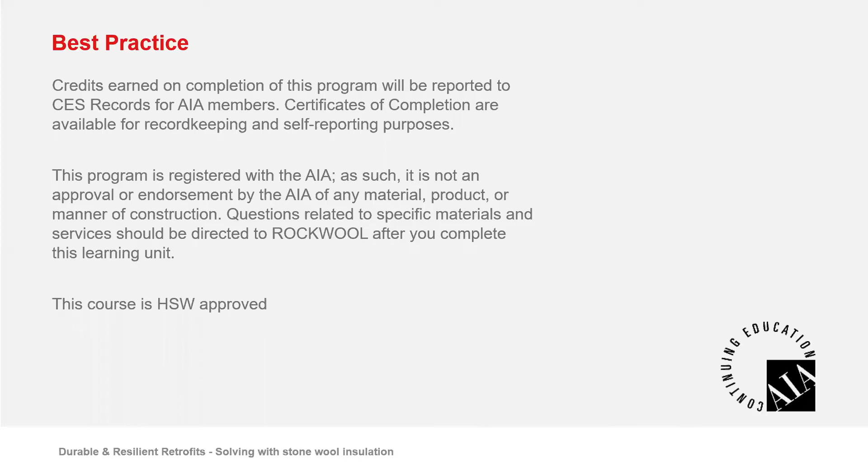And I think very excited here to be talking about retrofit, which is a hot button topic, definitely in New York, but also in California, and it should be globally. Hopefully, we'll start tackling this because a lot of the energy use that's coming out of our building stock is coming from buildings that have already been built and will continue to operate for decades to come. So it's a very critical component of our carbon reduction strategy globally. And we're going to get into some of that as we go through this program today.

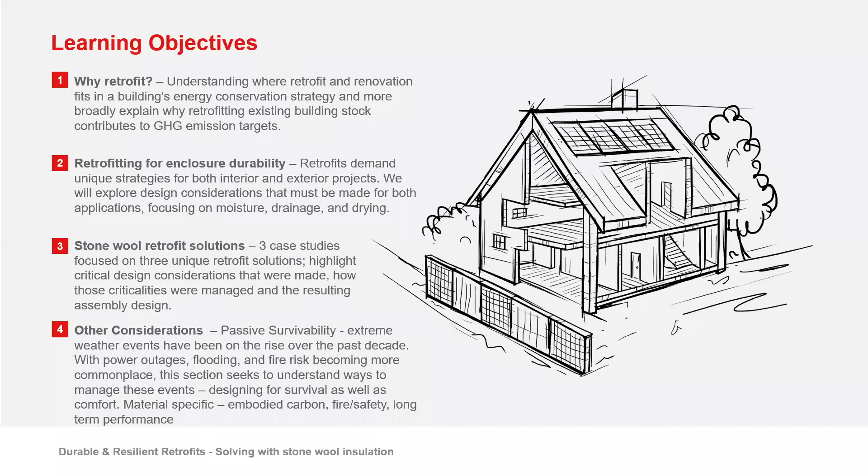But there's a lot of other considerations we want to make, right? We're trying to reduce the operational energy use of our buildings, but we also want to consider the embodied carbon of the materials that we're trying to select. Understanding the durability and robustness around fire performance should really be critical. Understanding long-term performance, right? We don't want to have to make these modifications and spend more energy in another decade to do all this work again. So all of these things come into play as far as considerations.

So today's program, obviously, we're going to be talking a lot about stone wool insulation. So these are going to be strategies that don't include foam plastic. And that's another unique part about this program, looking at more, we'll call it sustainable, healthy, durable, robust solutions using stone wool. And so I want to start off by minimizing any confusion about what stone wool is, because you probably hear a lot of terms like mineral fiber, mineral wool, stone wool, obviously slag wool.

So just to start off here, mineral fiber is really the overarching generic term for fibrous inorganic substances. And that's then categorized into three groups: fiberglass, which I'm sure many of you are familiar with, more low density, your pink batt. Then you've got mineral wool. And under the mineral subheading, you've got either stone wool or slag wool.

So mineral wool is made out of two primary ingredients, which is volcanic stone, rock, and then slag, which is the byproduct of iron ore when you're producing steel. So slag makes up the recycled content. When you have a higher percentage of stone versus slag, it's called a stone wool. If you have a higher percentage of slag than stone, then it would be called a slag wool. So both are under the mineral wool segment.

We're going to be talking a lot about stone wool here today, just so you have an understanding of what that terminology means. And then you've got refractory ceramic fibers, which we're not going to be getting too deep into today. That's more of an industrial type of application of materials for high temperature, but not really in the built environment for what we're dealing with.

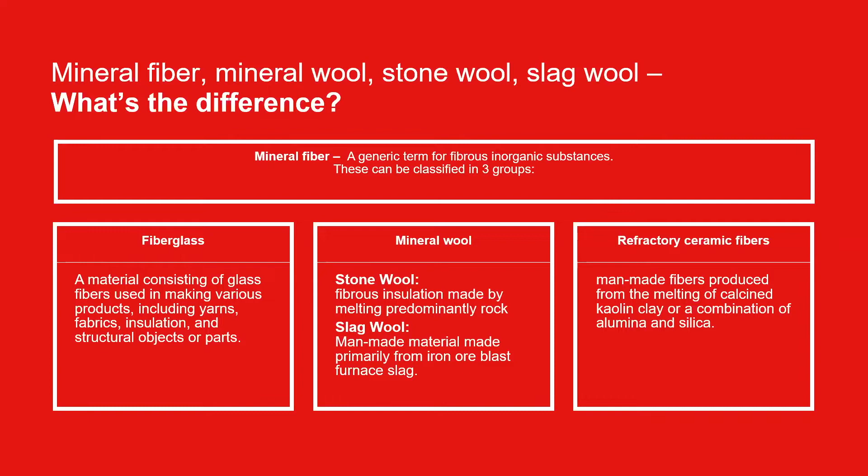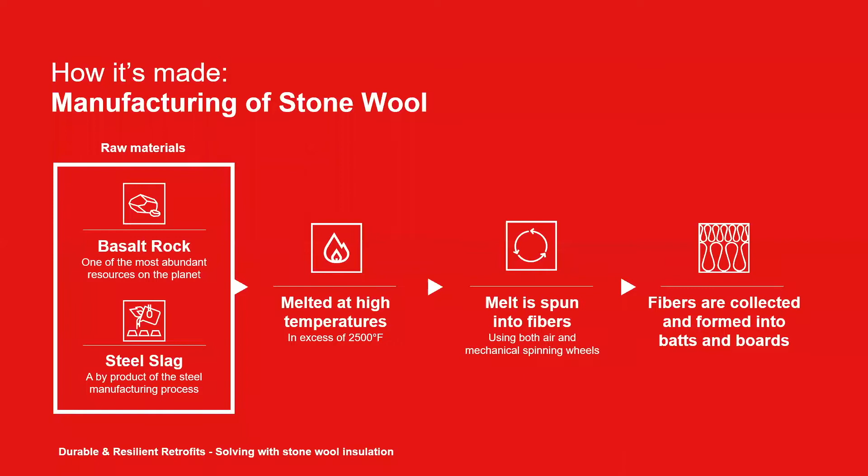So again, just making the product, basalt, slag, you're heating that up to very high temperatures, and as it melts, it's going to kind of go along spindles, not too different from the process of making cotton candy. And then that melt can be spun into either higher density boards or low density batts.

And so that's one of the benefits, particularly as we talked about retrofits and different types of applications, is that stone wool has a tremendous amount of versatility. So unlike other fibrous insulations that can really only be used in low density batt applications, or on the other end of the spectrum, foam plastics, which are traditionally used in very rigid exterior environments, stone wool can cross that spectrum and be used for both low density as well as high density applications. And that includes low slope roofs, below grade foundations, under slab, exterior wall, things of that nature.

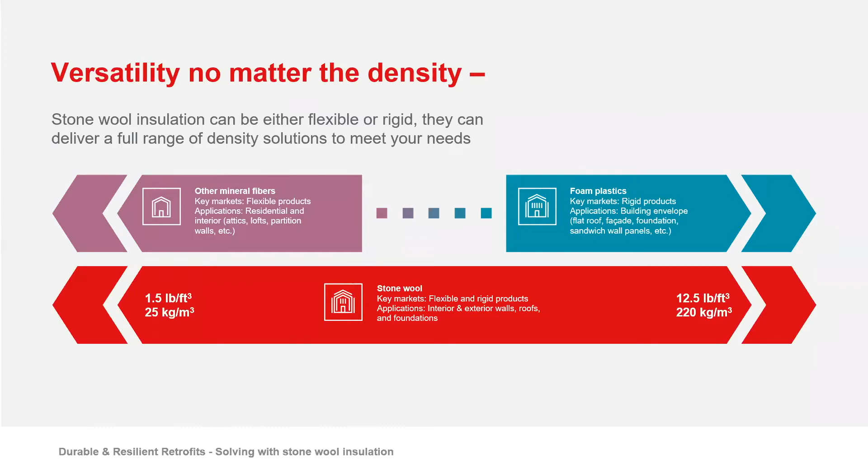All right, so we'll dive into why are we retrofitting? This is probably not surprising statistics for anybody on the call, but buildings generate nearly 40% of our annual greenhouse gas emissions globally. When we look at cities, whether that's New York or Los Angeles or San Francisco, the implications of our buildings on carbon emissions is a lot higher. In New York City, I think it's 68% of our carbon emissions are coming from our buildings.

Buildings account for 30% of the energy used globally. We'll potentially see a rise of 50% in energy consumption by 2050 if we're not taking any action in this existing building stock. And really the scary statistic is that typically just under 2% of our buildings are being addressed annually when it comes to retrofit. So we really need to start to shift our focus.

And it doesn't really make a difference in terms of what climate. The energy use of buildings will play a role regardless of which climate it's in. And so that's why we're here talking about California or New York. So these are just charts showing energy sources for office buildings. The chart on the left is showing more of a cold climate, Canada. The one on the right is showing California office buildings.

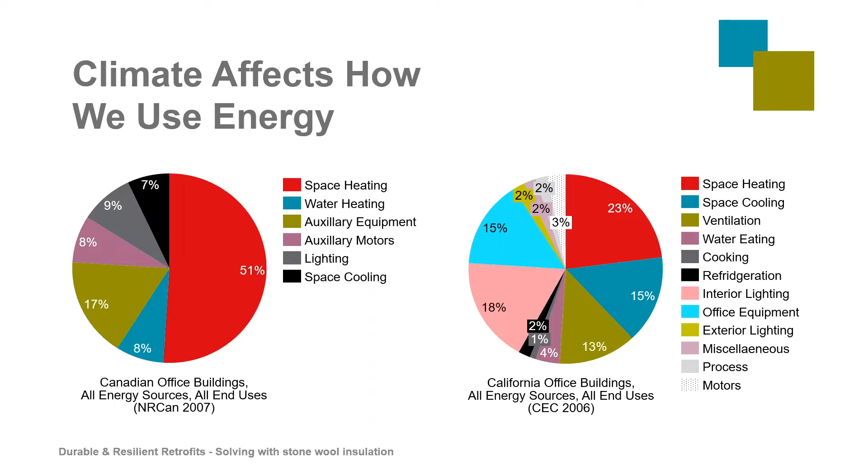And we can see here the building enclosure is going to impact space heating, space cooling, as well as ventilation. So three key components that are going to impact energy use. And we can see in either one of these cases, whether we're talking about California or Canada, we're over 50% or thereabouts in terms of the impact on energy use coming from heating, cooling, and ventilation, which all tie back to our building enclosure.

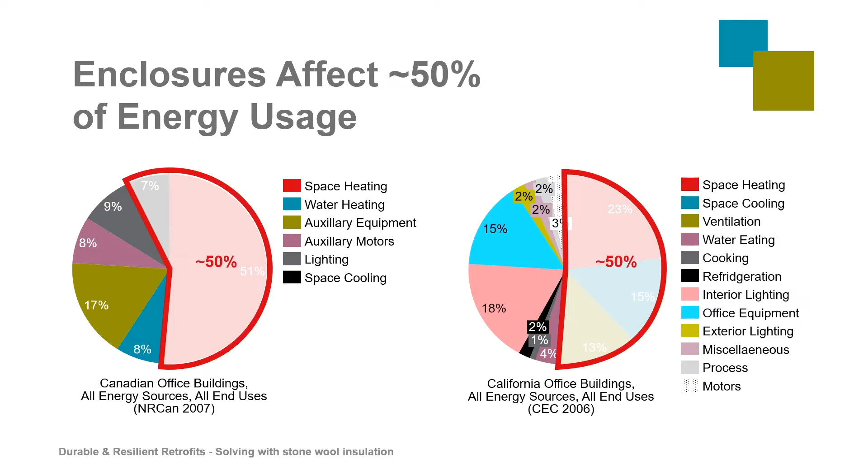And so as we look at specific strategies on how to improve performance, we have different choices that we can make: minor retrofit options to major retrofit options to deep energy or deep retrofit options. So just to categorize these, if we try to take a minor approach, it's really just talking about sealing or caulking, maybe using some spray foam to help improve air tightness, looking at upgrading lighting systems, nothing too invasive.

We can then also maybe make this shift to more of a major retrofit, which is going to have a little bit more of a holistic approach that you can tier. There's going to be some disruption, but maybe not major disruption to occupants. And that could include adding insulation where it makes sense, maybe replacing some of our windows and doors, upgrading some of our heating and cooling systems, making them more efficient, installing low flow faucets, addressing sub-metering, which we're seeing a lot of in New York City based on code requirements.

And then the real big one is going to be our deep retrofits, which is a much more holistic approach. It's going to be a higher cost initiative. It's going to require more of an overhaul of the building itself. It could potentially require significant reconfiguration of the interior, maybe a displacement of occupants for a period of time. But now we're looking at addressing the envelope, the walls, the roof, replacing insulation, maybe having to replace cladding, certainly looking at window modifications.

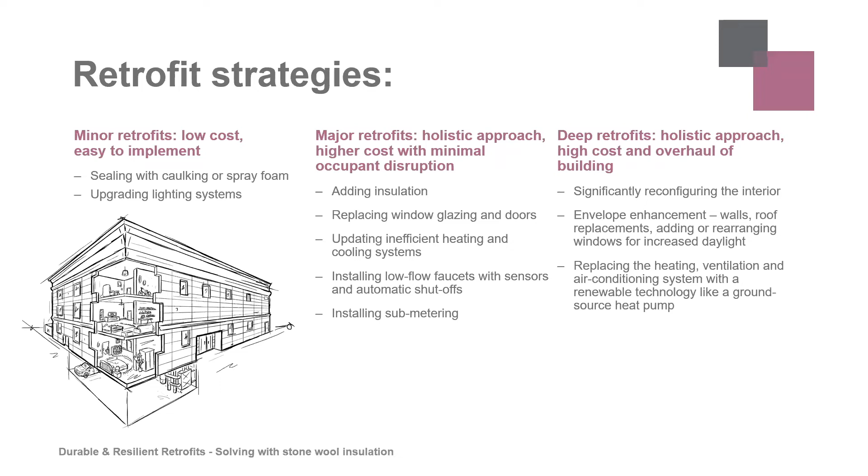From a mechanical perspective, it could be fully replacing the heating, ventilation, air conditioning systems, and looking at using renewable technology like ground source heat pumps. Regardless of what we're looking at, as we look at these retrofit opportunities, there's a lot of considerations that we're going to be taking into account.

I think a lot of us on the call here today are looking at trying to do retrofits right now from an energy use perspective, trying to reduce that energy use, trying to reduce the operational carbon emissions from our buildings, or the operational carbon, and then also looking at the embodied carbon as well from the materials that we're using. Sometimes we're looking at these initiatives from a thermal resiliency standpoint. I mentioned passive survivability, trying to make sure that these buildings can remain safe in power outages and keep occupants safe and healthy if we're having some climate challenges.

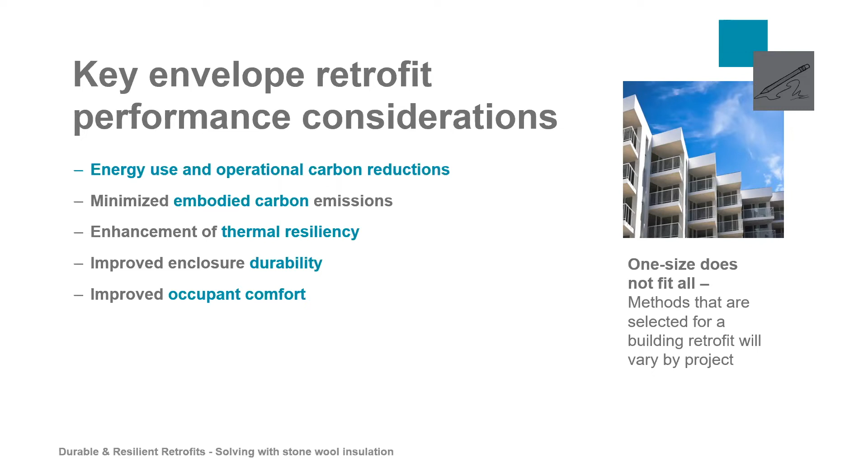Sometimes we're just looking at improving the durability and the robustness of our buildings. We see a lot with Local Law 11, having to do a lot of repointing of our buildings. Maybe there's some initiatives that we can take here to improve that with a retrofit. And again, sometimes it's just about improved occupant comfort. Many of us are enduring lots of uncomfortable interior environments that can be remedied through some level of retrofit. And so retrofitting for enclosure durability.

I talked about durability already. Just so we understand, durability is not an intrinsic property of a material, but it's really a function of that material and the environment that it's being used in. In fact, some materials can be very durable and robust in, let's say, drier northern climates, but not so great in southern humid climates. So we want to understand that climate perspective and what that means from a durability standpoint.

And so before I dive into the case studies around retrofit, I think building enclosure control functions are really critical for us to understand whether we're looking at new construction or retrofit construction. And so all these considerations are really critical. Here are 6 specific control functions that we want to address. Typically, rainwater or water control is going to be number 1. Rain is the most impactful in terms of building degradation over time, and so we want to think about how we navigate that effectively. We'll see rain screens used quite commonly as a really effective way to address moisture management in buildings, and we're looking at that in this section detail here.

Air control is really key. If you have air leakage in your buildings, odds are likely you're also losing thermal value because air is bypassing your insulation layer. But with air movement also comes moisture in terms of vapor that can condense within the assemblies. So we want to understand air control. We want to optimize air tightness. Passive House brings air tightness as a major component of performance from a durability standpoint as well as a thermal perspective. Thermal insulation, we're seeing a lot of added insulation. We're trying to get continuity with that insulation, reducing thermal bridging to optimize thermal performance.

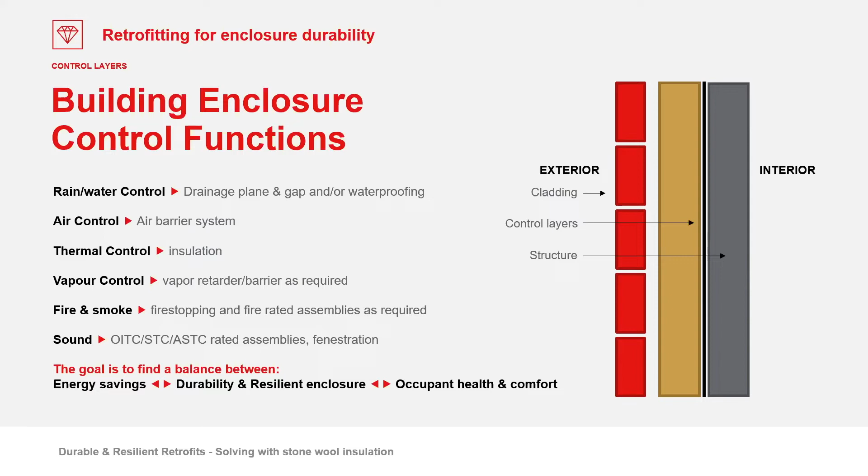And then slowly but surely, sound is becoming a big part of this. Passive House really contributes to very acoustically sound environments, which is great. And that can contribute to more healthy living, healthy learning, more mentally stable environments for the occupants of buildings. Looking at OITC, STC, ASTC rated assemblies is really important. And so ultimately the goal here is to find a balance between improved energy performance without sacrificing durability and resiliency, and also trying to maximize occupant health and comfort.

I go over this slide quite a bit and programmatically with a lot of my presentations, but when we deal with buildings, particularly historic buildings or buildings that are needing to be retrofit, not all historic, but existing buildings per se, a lot of them aren't built with a lot of air tightness in mind or with much thermal insulation in mind. And so sometimes the benefit of that is that if those buildings get wet, you put the heat on the inside and it dries those buildings out pretty quickly, and it's not trapping moisture within those walls.

And so when we start to build more high performance assemblies, whether or not they're using this kind of split insulation strategy or other strategies, maybe just interior insulation, sometimes just exterior insulation, we have to recognize that as we're improving the air tightness and as we're improving the thermal performance of these walls, they're not going to dry out as quickly as they used to, right? We're keeping them kind of warmer and relatively dry.

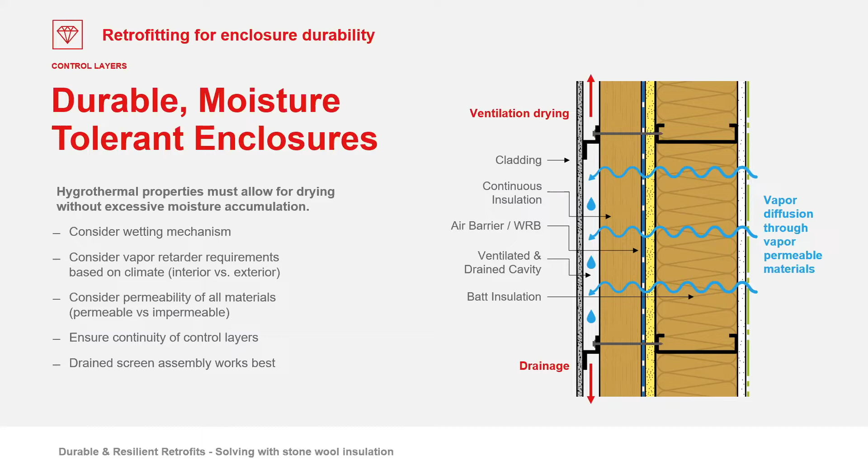So if you have leaks, if you have some diffusion challenges and condensation issues, you want to make sure that you're building in mechanisms to allow those buildings to dry out through natural diffusion. And so understanding the permeance of your air control layers is really critical. Understanding you might not want vapor barriers in certain climates. You might want to allow for drying to the inside or drying to the outside is really critical. And even with the insulations that you're choosing, vapor permeable insulations like stone wool really can help benefit and maximize the moisture performance and the resiliency of those buildings.

And so now as it pertains to retrofits, right, we have different options on retrofits. In general, from a building science perspective, an approach to doing an exterior energy retrofit is always going to be more favorable, right? So if you have little or no insulation on an existing building and you put air tightness on the outside and you put all of your thermal insulation on the outside, it starts to reduce the risk that you'll have condensation issues within the existing structure of your building. You're putting it all to the outside. And so any sort of moisture challenges are now happening safely on the outside of the building.

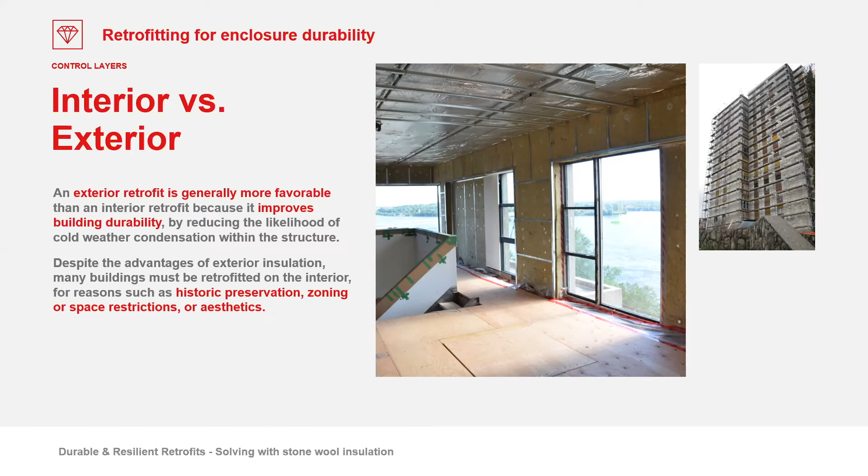And so it can help to improve the building durability that way by kind of shielding or protecting the existing building from any sort of climate challenges or moisture issues. But despite those advantages, sometimes it doesn't make sense. Obviously we have historic buildings. We have a lot of buildings in urban environments with lot line issues where you just don't have the opportunity to add insulation to the outside. And in those cases, moving to an interior energy retrofit might be more appropriate and can be successful. You just need to understand the science around that and really understand how to manage moisture in those types of assemblies.

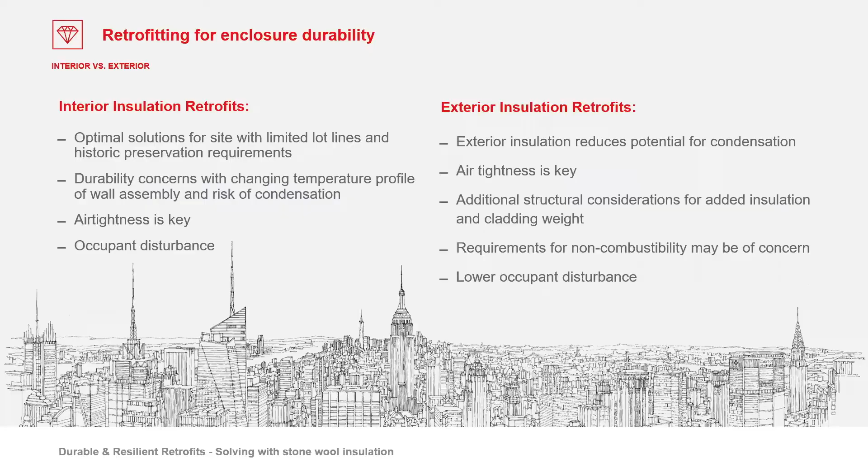It could be semi-rigid or rigid stone wool. You'll be installing it in between clips if you're using a clip and rail type system for the cladding. And then you've got your cladding, and that cladding can be a variety of materials, from metal panels to fiber cement panels to porcelain. There's an abundant amount of different types of cladding. And those claddings might have different requirements from an attachment perspective. So that all has to be kind of assessed out.

The critical considerations here, as I mentioned, is the structural capacity of that existing wall and where are you fastening these components. Can you attach to existing brick, or do you have to go back to the structure, right? Analyzing that. Maximizing thermal performance is going to be a function of that clip system, right? So you want to try to minimize as much thermal bridging as you possibly can to, again, maximize the thermal effectiveness of that insulation.

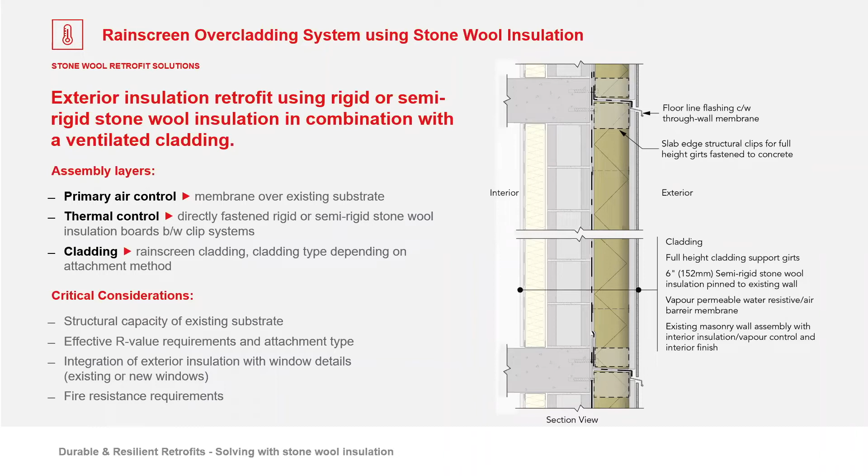And so there's plenty of systems that we'll go through in terms of how that can be impacted. Detailing around windows and doors, particularly existing ones, can be a real challenge. So that needs to have some additional consideration. And then last but not least, we mentioned fire. So here's a project that I believe was part of an initiative through New York Passive House earlier this year as part of kind of an overview of Local Law 97.

But this is a job on the Upper East Side of New York City, 201 East 79th Street. It was a co-op building, and the design architects are Rogers Partners, the contractor CM and Associates, and Rawlings Architects was the architect of record as well. But this was really driven by the owners of this building, who were just tired of dealing with Local Law 11. Their building was constantly under scaffolding and having to deal with the repointing of the brick. For those people that are not familiar with Local Law 11, it's kind of the assessment of the brick you have to do every few years.

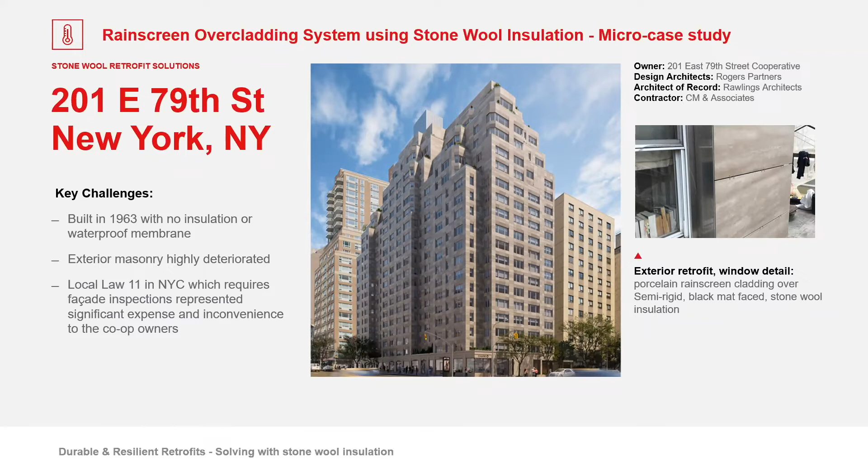But they were having major issues with their brick. Obviously, the masonry was highly deteriorated, and there was no insulation or waterproofing membrane. These are very traditional. There's an abundant amount of these types of buildings in New York City that were built in the 1960s, kind of wedding cake looking buildings. As they were analyzing this, they were originally thinking that they would remove the existing brick and put new brick on.

They understood that while they felt that they weren't going to get to passive house levels, they wanted to improve performance as much as they could. And in New York City, we have Local Law 97 out there as well. And so this was an opportunity for them to really try to reduce the carbon emissions of their buildings, so that they didn't fall in line with any penalties that are going to be forthcoming from that law. And so they wanted to add levels of insulation. They wanted to improve the air tightness. And so these were all major goals of this initiative.

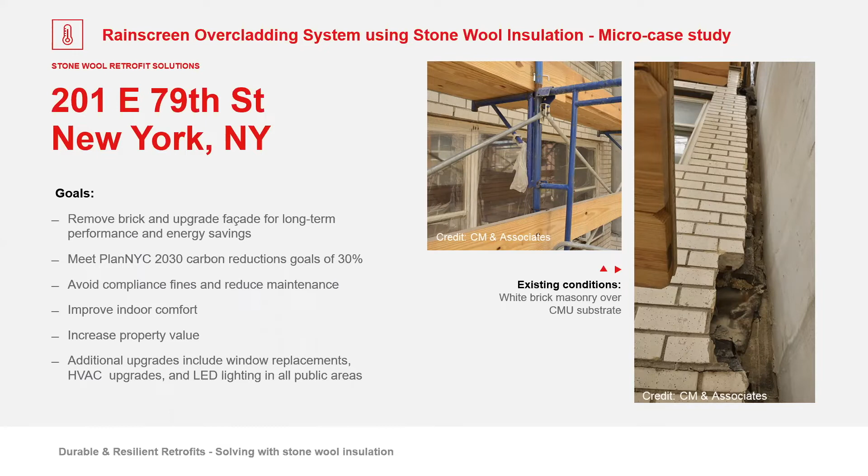They wanted to obviously improve the internal comfort. A lot of the occupants of these buildings also saw this as a potential means to increase the property value by putting the new skin on the building as well. Many of these units already had recent window upgrades, so windows were not a prime focus for everybody, but there were opportunities for the tenants to upgrade their windows if they wanted to do that during the time of this work. Again, the solution here was to go with this Overclad.

They used a porcelain panel as part of this reconstruction. They used roughly 5 inches of stone wool insulation. So that's going to get them roughly an R20, just over an R20, maybe R22 in terms of thermal performance. And so you can see that here. Before they put that insulation on, they did add a fluid applied air and water resistive barrier to optimize the air tightness.

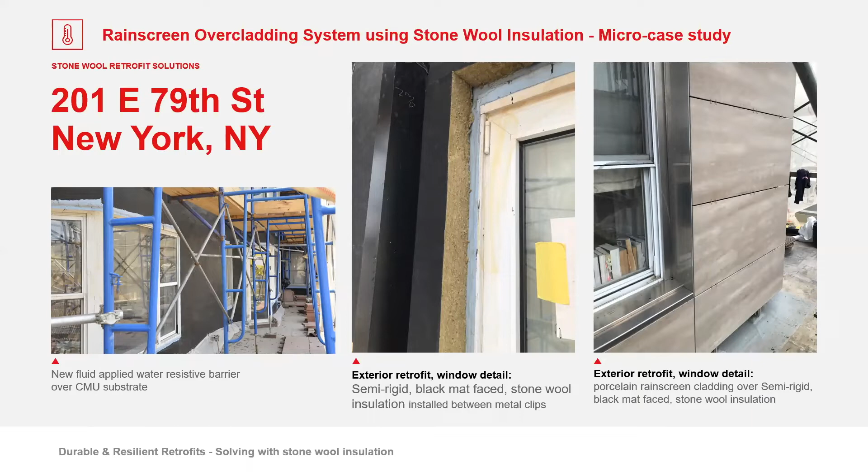They did have to come up with some unique strategies around the windows to tie that in effectively. It's still ongoing. It's very close to completion, but they're very excited with seeing how that transitions. And so when we get to the cladding attachment concerns that I mentioned, right?

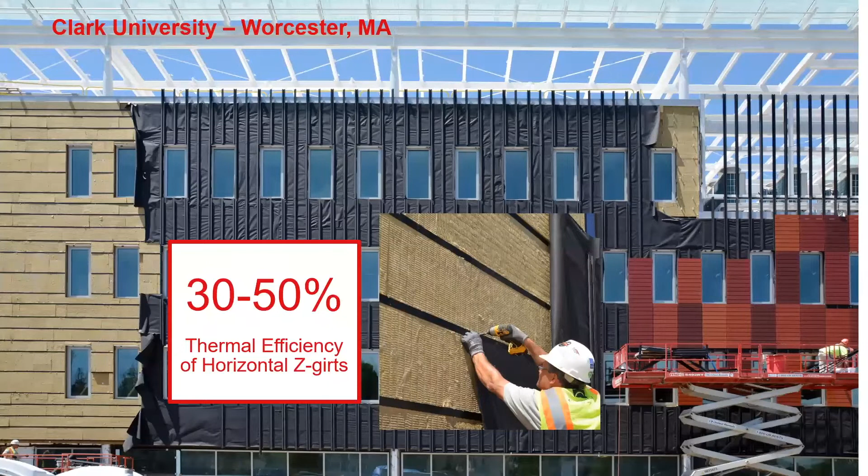So when we put any sort of cladding onto our building, whether or not it's overclad or new construction, we're putting these types of systems in. We want to think about the thermal bridging that goes along with these cladding attachments. And so the project that we just referenced, which I'll go back to, used a clip and rail system to try to minimize that bridging.

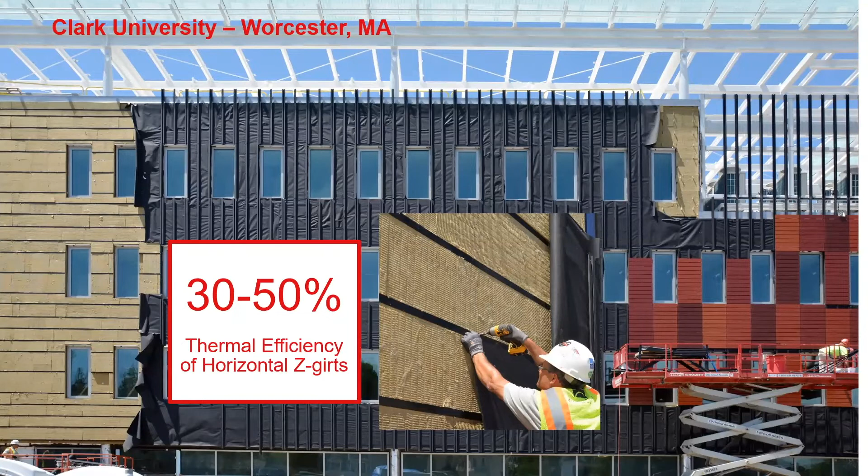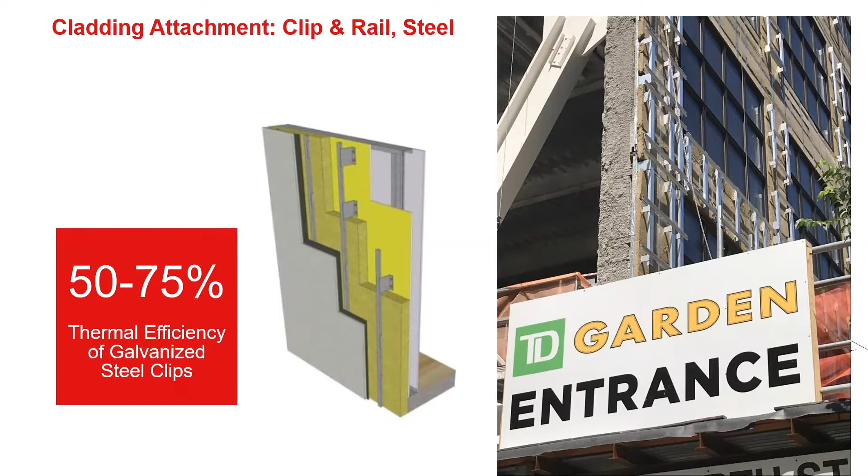In fact, particularly for the retrofit market, if you can go slab to slab on a lot of these connections, you can get to even higher levels of performance, which is what we're starting to see in that 85 to 90% effective range. You can shift away from metal, right? You can move to fiberglass clips, which are much more thermally efficient than steel or aluminum clips. Again, you get up to 95% effective.

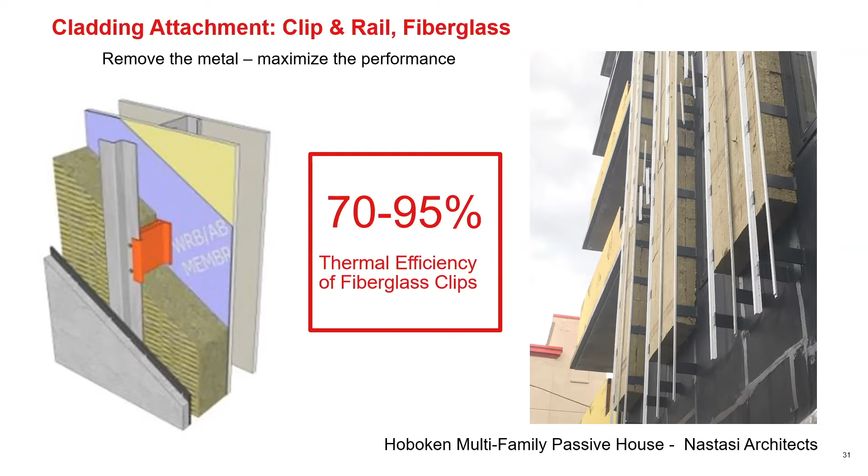This is actually an image from a passive house building in Hoboken, New Jersey that used 8 inches of semi-rigid stone wool. This was not a retrofit. This was a new build, but it gives you a sense of these types of materials and how they work. Additionally, there's higher density stone wool that can transfer the load of the cladding through it back to the structure. This minimizes those clips and rails, and the only bridging you have are the point bridges of the fasteners. So this can get you to even higher levels of performance.

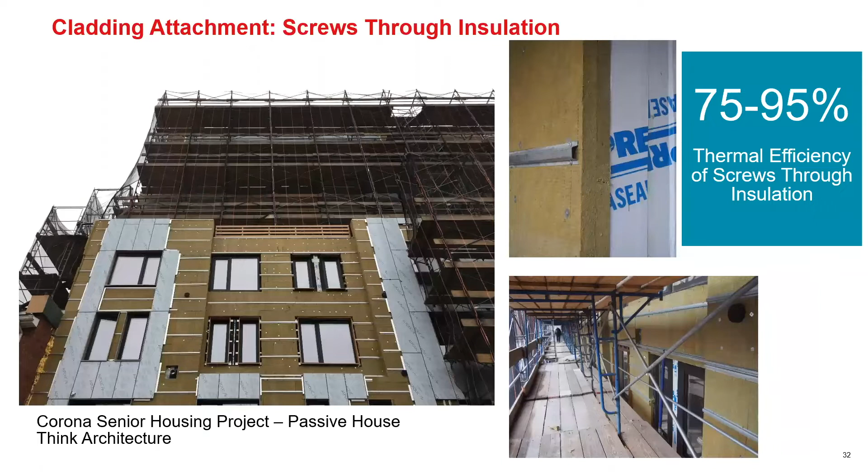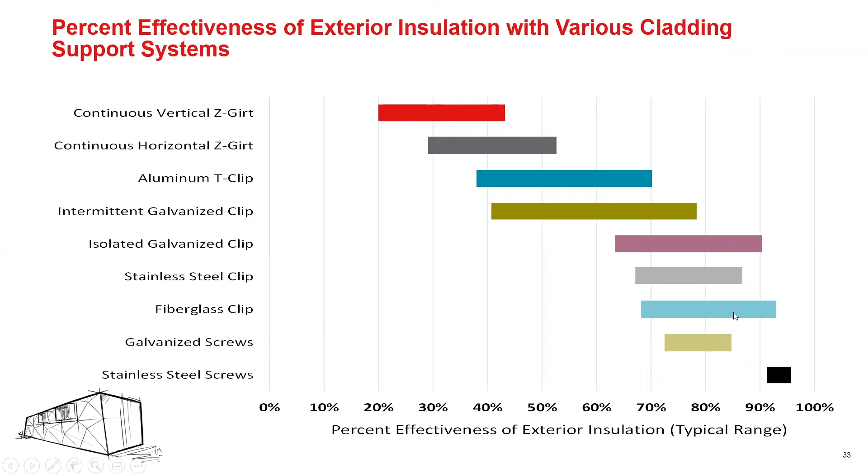So again, lots of options to think about. But the real key thing with any sort of overclad solution is trying to minimize those thermal bridges of the cladding that you're putting on the outside. And you can see here, these Z-girts are the worst performing. As you go down and to the right with intermittent clips and with screw-through insulation, you're getting much more efficient and effective with that solution.

And speaking of efficiency with minimizing thermal bridging, EIFS has a really great approach to that, right? By minimizing a lot of that bridging. I think many on the call are probably very used to using foam-based EIFS, but might not be familiar with the fact that stone wool EIFS solutions exist as well. So particularly when you're trying to target non-combustible assemblies, you can move in this direction.

For these types of assemblies, as we look at these control functions, your primary air control and water control, similar to the overclad solution, is going to be the membrane that you place on the existing wall. Your thermal control is going to be, in this case, a rigid stone wool insulation that is not going to be just adhesive based. One of the differences here is you're going to need some level of mechanical fixing to support that, and there are thermally efficient, non-conductive fasteners that can help maximize that performance. That is something traditionally used with stone wool solutions that might not be used with foam solutions.

And then your cladding is going to be the finished render over the reinforcing mesh, not too different from what you've seen before. So again, with any EIFS system, a critical consideration is drainage efficiency. Many times you'll see adhesive ribbons to create some level of drainage behind the insulation, or something that will create a geometric drainage cavity behind that board. You want to always think about superior board quality and long-term durability. There are specific products made for these applications that might not be the same products you would see used inside walls or even in rain screens. So some of the stone wool is very specific to these applications.

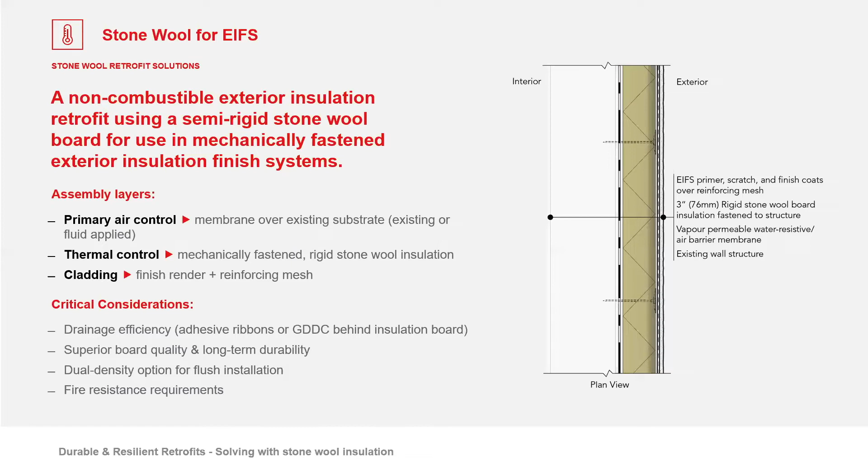And then last but not least, fire resistance requirements, understanding the fire performance here. And so this project here that we're going to reference is a passive house building. This is by ERA Architects. This is in Hamilton, Ontario. It's called the Ken Soble Tower.

A much older building, a low income housing building that had a deteriorating envelope. They had no insulation in this building. They found mold and all sorts of hazardous materials when they got to the site. The developer was really wanting to just tear this thing down and start anew. All the systems were at end of life, but ERA really wanted to salvage the building and understood that from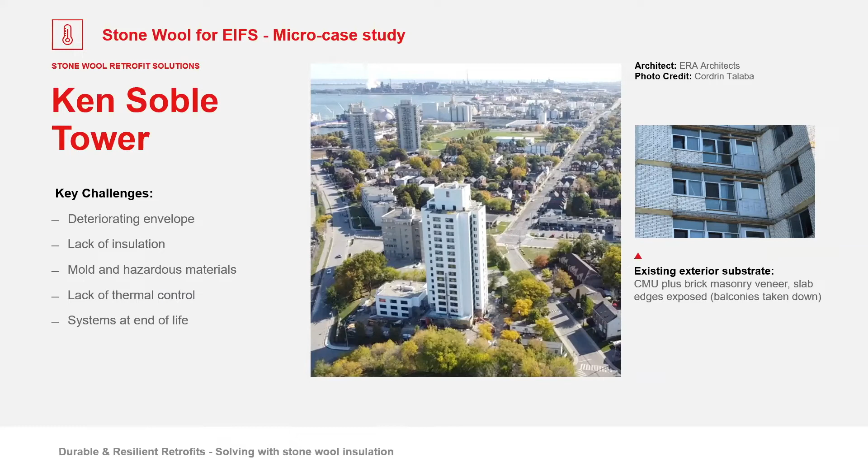an energy perspective, really trying to salvage an existing building is the number one thing, right? They didn't want to lose the carbon that had already been put into the structure. They really wanted to make it better. And so the goal for them and for the owners here was to create an ultra low energy retrofit that would also maintain the operational affordability of the building for the tenants.

They wanted to dramatically reduce the greenhouse gas emissions by over 90%. And so the way for them to do that was to follow the EnerPHit standard, which is the retrofit standard set forth by PHI, the International Passive House Group. And so a focus here was to reduce the thermal bridging, to enhance the indoor thermal comfort.

Climate resilience was a really big part of this because they'd had some power outages in the area and they understood the impact, particularly for populations that might be residing in low-income housing, or senior housing, a lot of populations that might not have the same capacity to evacuate a building under these conditions. We want to make sure that those populations are able to stay and shelter in place if there's ever any sort of weather issues. So that was a big part of this initiative.

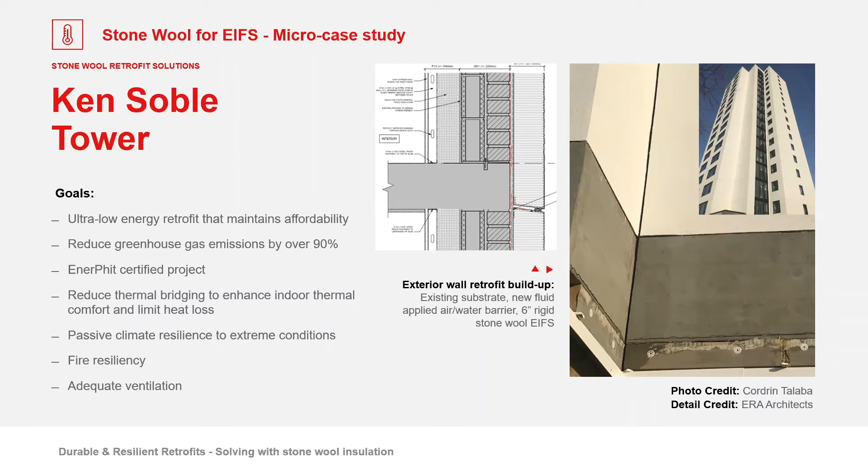Fire resiliency was a big part. They did not want to use any sort of combustible materials on the exterior here. And they wanted to make sure that they had the ventilation as they needed it. So just a few images of what this looked like. So this is, again, the stone wool solution that they used. It was 6 inches of stone wool with some drainage cavity behind it. You can see here the reinforcing mesh and the base coat that's being applied, but this gives you a sense of, again, this movement towards a stone wool type solution.

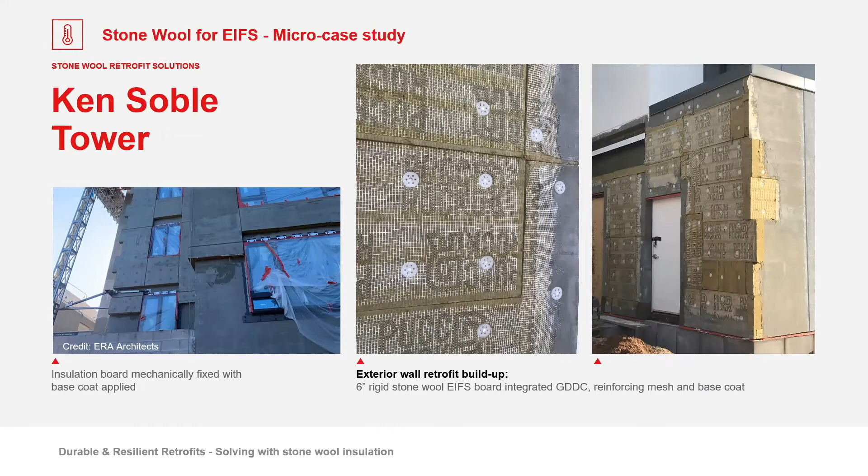And so to circle back on the passive survivability aspect of this building, ERA did a little bit of a study here, comparing and contrasting the existing design before they did the retrofit with the proposed design. And so what we're looking at here on this chart is the power outage impact of this building under those two conditions. And so the black line at the bottom here is representing your outdoor temperature. So this is an assessment that's happening during the winter months in Hamilton, Ontario, as you can imagine.

The blue line up top is representing that typical design, or what it was before the retrofit. And then the red line is representing the proposed design of the retrofit. So you can see here on the left-hand side, before we hit this vertical black line, is just under regular operation conditions. And we're using Celsius here because we're in Ontario. So you just have to understand the differential in temperature shift.

But once that power outage occurs at this vertical black line, you can see that our blue line drops pretty dramatically, right? And this pink dotted line represents the typical indoor temperature survivability threshold. So once the temperature starts to drop inside below this pink line, it's really unhealthy for the occupants, and they're probably not going to be able to stay there too much longer without some severe impact to their health. And so you can see just in a matter of hours under that existing design, it was at a point where really the tenants needed to evacuate that building.

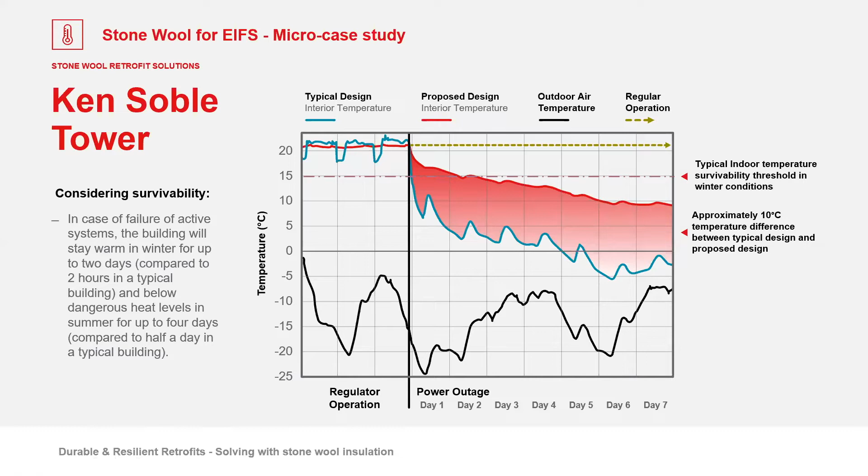And so it's really something that you shouldn't shy away from. And there was a study that was also done during the summer months. And what they identified was the difference here was that the dangerous levels in the summer kept the occupants able to stay in that building for 4 days compared to about a half a day for the typical design. So again, whether or not we're talking about extreme heat or extreme cold, a movement to these energy retrofits is really impactful for the well-being of the individuals that are occupying these buildings.

All right, so the last retrofit solution that we're going to be talking about is the interior approach. Some buildings you might not have the option to put insulation on the outside. Again, it could be because you have a landmark building, you have an owner that doesn't want to lose the aesthetic appeal of the existing building they have. You might have some lot line challenges. And so here, again, it's not that you can't do these energy retrofits. You have to be more careful on how it's being done. And now all of a sudden your insulation and your air tightness needs to really be achieved on the inside.

And so in this case, as opposed to the other cases, our primary air control layer is going to actually be happening on the backside of the existing wall. In this case, we're looking at CMU, but you could imagine this being brick. And so now you're applying what we typically would see as a fluid applied air barrier, in many cases, particularly in the New York City climate, something that's going to be vapor permeable. We then come back with a continuous semi-rigid stone wool insulation that helps to decouple the interior studs, because we want to minimize the bridging of the studs there. We want to maximize that thermal continuity as best we can.

There's always going to be floor slabs and some other sort of structural bridging that we're going to potentially have to contend with. But if we can maximize the thermal efficiency from the semi-rigid insulation, that's terrific. And then you've got your vapor control strategy. In this case, we're seeing it sandwiched between this continuous insulation and some additional insulation in the stud cavity. And so in this case, we really want to minimize the moisture in the air that's transferring from the inside to the outside, right? During our heating degree months, particularly in mixed climates or cold climates, we're going to be seeing that vapor move from the inside to the outside. And so we're trying to stop that dead in its tracks at this location.

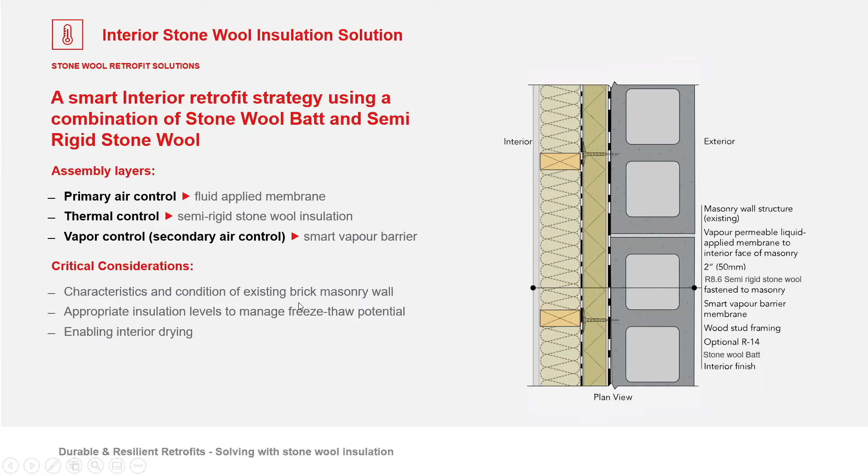But it's always still very, very important to kind of analyze that. Understanding the appropriate amount of insulation to manage that freeze-thaw potential is really critical. And again, enabling that interior drying is going to be important.

And so the example that we're going to use here is a project in Flatbush, Brooklyn. This is 1701 Albemarle Road. And I'll just preface this by saying this is a beautiful historic building. It was not the entire building that underwent the retrofit.

Henson Architects, and particularly Jane Sanders, who was involved as the passive house designer in this one, was just addressing one single tenant who really wanted to kind of showcase how unit by unit we can start to affect the impact of buildings on climate change, which is really ambitious.

But with Local Law 97 in mind, when you have tenant turnover, maybe this is an opportunity for these co-op buildings to really look at strategies to improve the performance of their buildings. So this project in particular might not go to the full EnerPHit certification, but it was really targeting passive house as the approach.

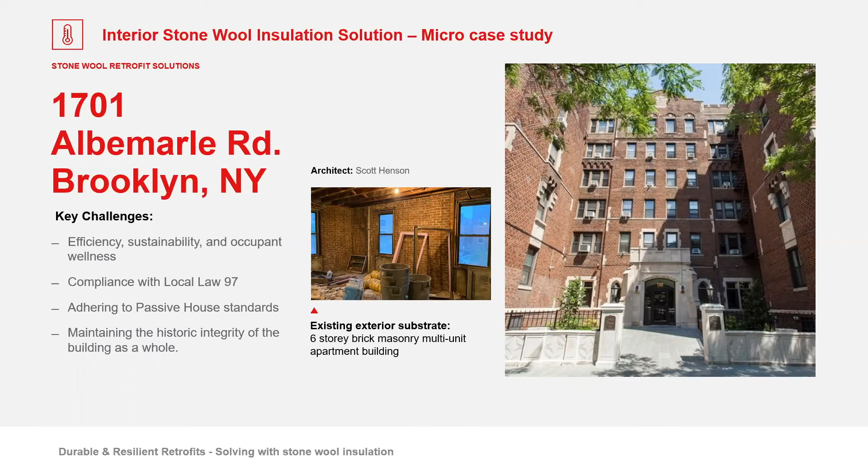So again, the challenges here were wanting to improve efficiency, look at sustainable options to do that, improve occupant wellness. They wanted to look at compliance with Local Law 97 on any of these large buildings. The focus was on adhering to passive house standards, and they didn't want to compromise or risk the historic integrity of the building. So the goal was to improve the thermal performance, improve the air tightness, and create a more durable assembly with limited risk.

And I think they're still in the midst of comparing the pre and the post performance of the assembly, and also analyzing the brick to ensure that this was going to be done well, and helping to generate a template for this to be adopted.

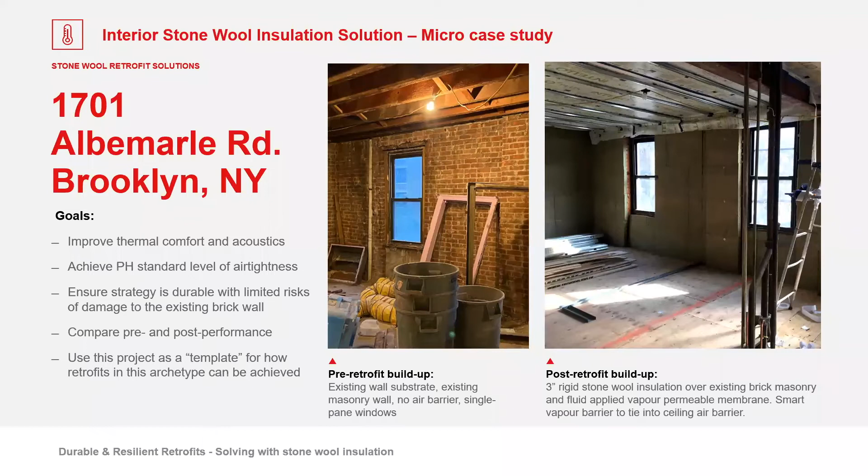And so you can see on the left-hand side here, this was the pre-retrofit buildup. Just standard brick, looks in pretty good quality. On the right, you can see the addition of 3 inches of semi-rigid stone wool continuously to start. Here's some better photos of what this looks like.

So you can see they used a fluid-applied vapor permeable air and water resistant barrier on the inside of the brick, which is going to give you your air tightness. It might also create a nice capillary break for any moisture that might be leaking in from the outside. But then you've got your continuous insulation. They did build up a stud cavity here as well to the inside of their smart vapor control layer.

And by doing this, they're also protecting their air and vapor control layer so that this can now serve as an effective service cavity. So if the tenants want to put in some electrical boxes or nail some pictures to the wall, they can do that without feeling like they're breaching their air and vapor control layer, which is great. And they did add some additional low density batt insulation after these photos were taken into that stud cavity.

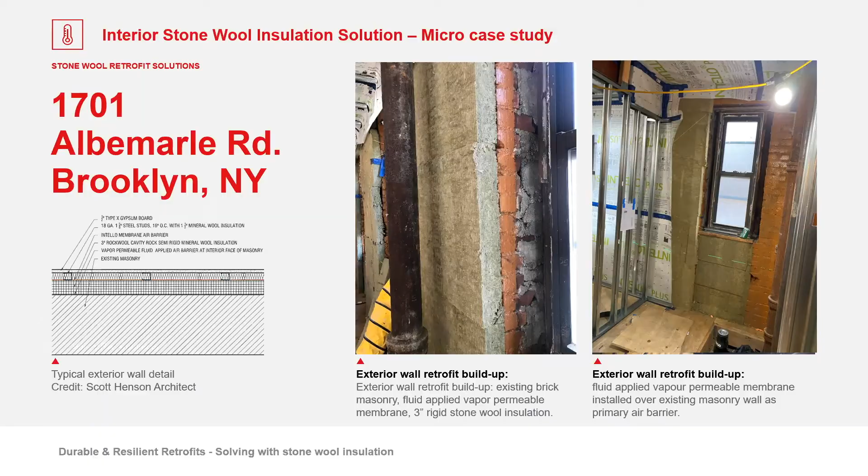All right, so I'm probably a little bit over time, but I'm going to hand it over now to my colleague, Pamela Souther, who's going to talk a little bit about some of the additional considerations I mentioned early on.

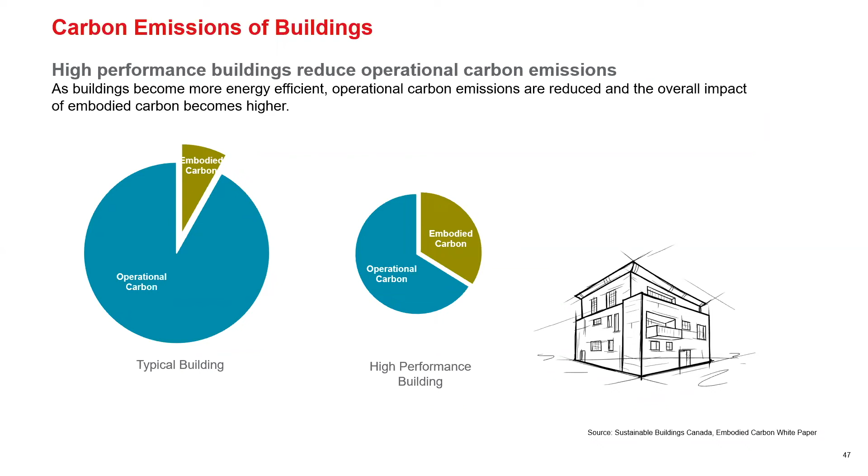So with carbon emissions in buildings, we're very focused on trying to reduce the operational carbon emissions with these retrofits. But as we improve that, whether with passive house or EnerPHit, the piece of the pie from embodied carbon becomes greater, right? So now we've reduced the operational carbon, and embodied carbon becomes kind of a big push.

Stone wool, as Todd has reiterated several times, is very environmentally stable. There's no off-gassing, no blowing agents in the material, and it doesn't provide or promote growth of mold or mildew. It's actually an inert product, non-combustible, and it has about 16 to 40% recycled content, depending upon which of our factories it is produced in.

So on the next slide, when you're considering the overall impact of each material for your specific project, it's not always about how high the embodied emissions are of the particular product, but you also have to consider how much of that product is being used in the building. For the most part, your structural elements will have the highest impact on embodied carbon based upon their individual impact and the high volume of that product use. However, next on the scale are facade products, including the insulation.

One thing to keep in mind is that insulation is the primary material that helps to reduce the overall energy and operational emissions of a building as a final product. So when we think about insulation and stone wool specifically, in its lifetime, the amount of carbon emissions saved by using insulation significantly outperforms the upfront emissions from its production.

With that, not all products perform equally, and the full sustainability profile of the material should really be assessed. Even within the same category of insulation, environmental impacts really differ. So it's important to consider the types of documentation available in the market. An environmental product declaration is the primary document referenced to assess environmental impacts of building materials. However, there's different types of EPDs available.

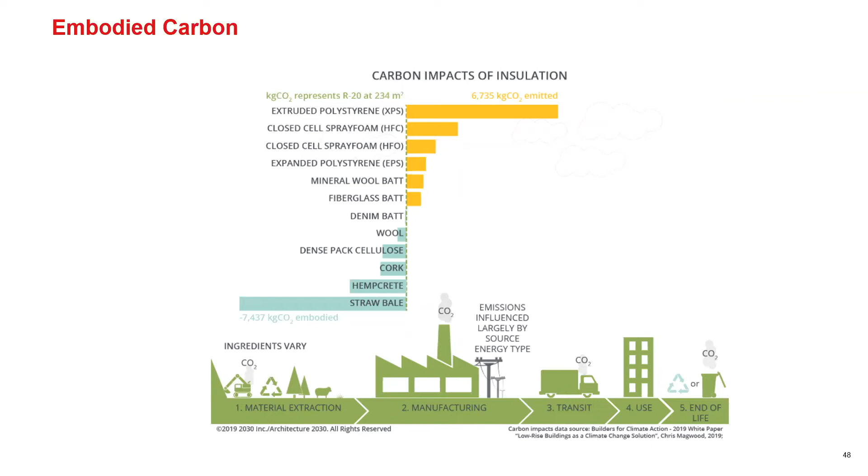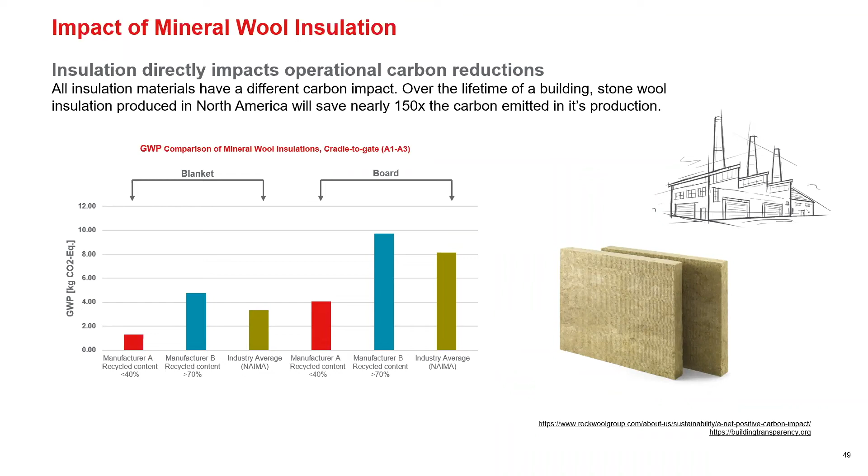A product-specific Type III EPD provides the greatest transparency and accuracy when calculating GWP impact. It's a third-party created and validated document that allows you to calculate for a specific product rather than a general product category. A specific stone wool continuous insulation board versus a general heavy density board as an example. A product-specific Type III EPD also has higher weight when it comes to your LEED calculations, accounting for a full credit versus an industry-wide EPD that is only accounted for as half a product credit.

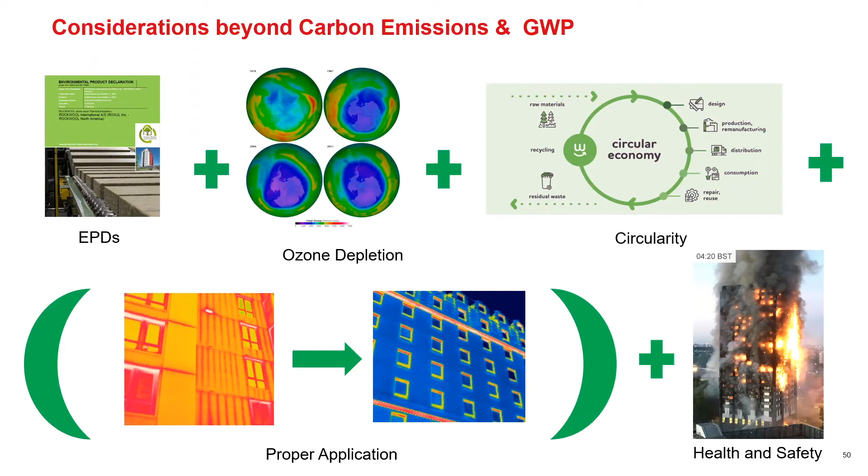When you're looking at the EPD, the transparent, verified, and comparable information about the life cycle environmental impact of products and services is what we're looking at. Different types of EPDs available within building products are your industry-wide, valued as 1/2 of the product for LEED credit purposes, product-specific, valued as full product for LEED credit purposes, and considerations beyond the GWP necessary for full sustainability benefits, such as ozone depletion potential and product circularity. Insulation materials are always part of the system and should be compared in situ to compare the full sustainability profile.

Todd had spoken briefly to some of the poor retrofitting that happened in the past. And of course, here, if you're seeing the slide already, you're looking at the Grenfell Tower tragedy in 2017. There was a huge loss of life in this, and it took a total of 24 hours to control the fire. So here it just really drives home the importance of using non-combustible materials. And we don't see fires like this in the USA predominantly because of our NFPA 285 testing, which was recently updated in 2019 and will be going into effect in 2022 with the new requirements.

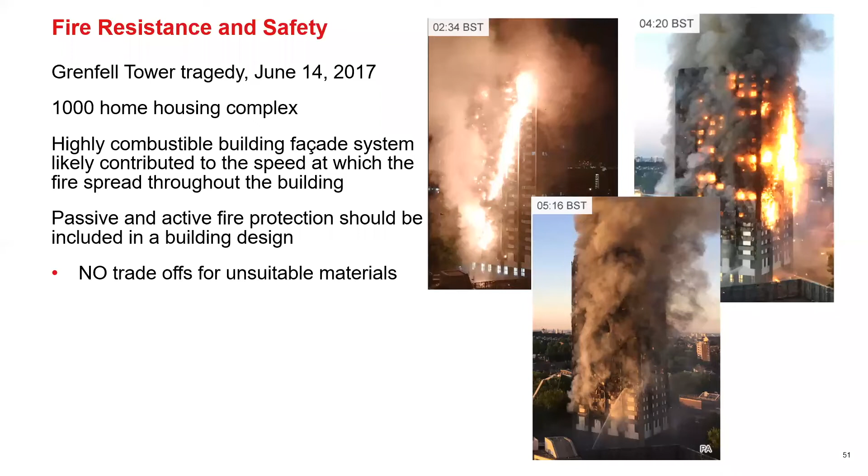But I will say one thing, everyone's talking about who is to blame for this tragedy. Well, this building underwent compliance for fire. They did 16 inspections on this facade. And nobody within those 16 inspections noted that the cladding they were using was not approved for tall building structures. So, where does the fault lie? Well, it starts with us and getting the correct design in there, but also the entire system has to pay more attention to these details.

So going to our climate change and the cause of significant increase in the frequency and severity of wildfires, first of all, fire is not strictly a WUI concern. I'm in California, and I'm just as concerned with fire in general as I am with the WUI zones. Governor Newsom has proposed regulations that mandate building materials to be both fire resilient and fire hardening for retrofits. So as a state, I think we're becoming more proactive. And whether you're dealing with a severe fire risk zone or a light risk fire zone, both enclosure concerns and defensive strategies should be considered.

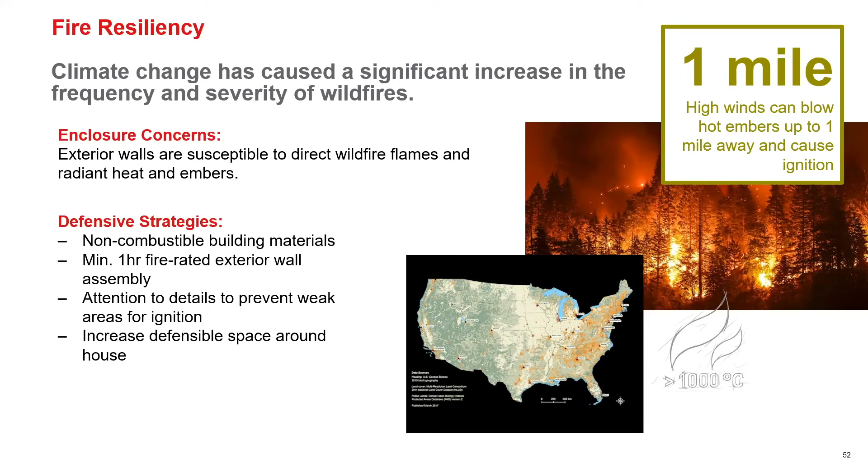This is a quick video we're going to do. It basically is going to be a demonstration, and let me get it started for you and I'll walk you through it. So this is a standard wall assembly using foam plastic on the top and comfort board on the bottom. The bottom video is sped up to show a full 30-minute test, while the top video is much slower, showing only 3 minutes. Vinyl is used as the cladding in these assemblies and provides absolutely no fire resistance, and it melts away quickly.

Stone wool at the bottom is providing a layer of fire resistance and providing no flame spread whatsoever. The foam plastic basically provided a source of fuel and quickly spread up the firewall and into the attics. We're going to move forward from that one since I have delays on my video as well. All right. Well, I don't know if everyone can see it, but basically what this showcases is that in just 3 minutes, with the foam-based product, the fire breaches the attic and they have to stop the fire. In 30 minutes, they actually shut down the test with the stone wool because it wasn't moving forward at all.

And so this was put together by the UL Fire Service to really analyze the impact of fires, particularly where we're seeing a lot of wildfires, and understanding the cross section of addressing energy code requirements to improve thermal performance of our buildings with the concerns around fire. And so just understanding that there are options out there that can help with fire hardening.

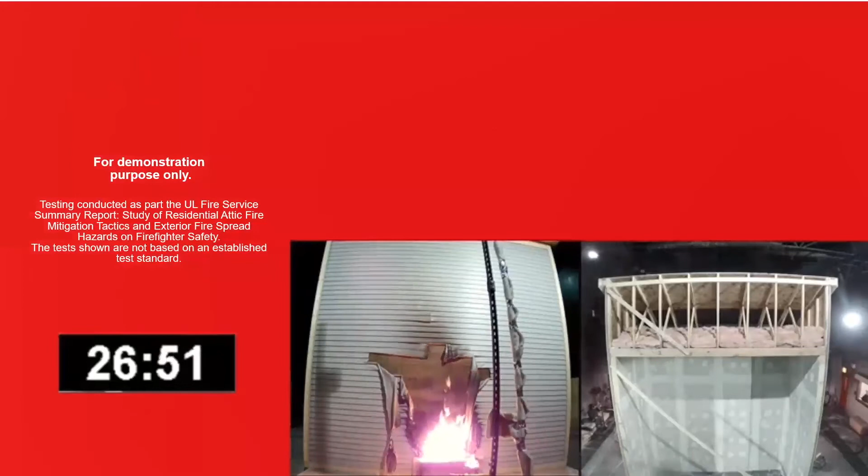Obviously, it's not just the insulation, it's actually how we're designing our buildings and creating some gaps between the building and any sort of combustibles. But the use of materials is really critical to consider as well, not just in California, but that's a paramount area. But we're seeing these kind of wildfires all over.

Yeah, all right. And the foam plastic really does provide a source of fuel, and that's why the fire spreads so quickly up the wall and into the attic. The bottom line on that. So again, the stone wool is non-combustible and no smoke, which is really crucial.

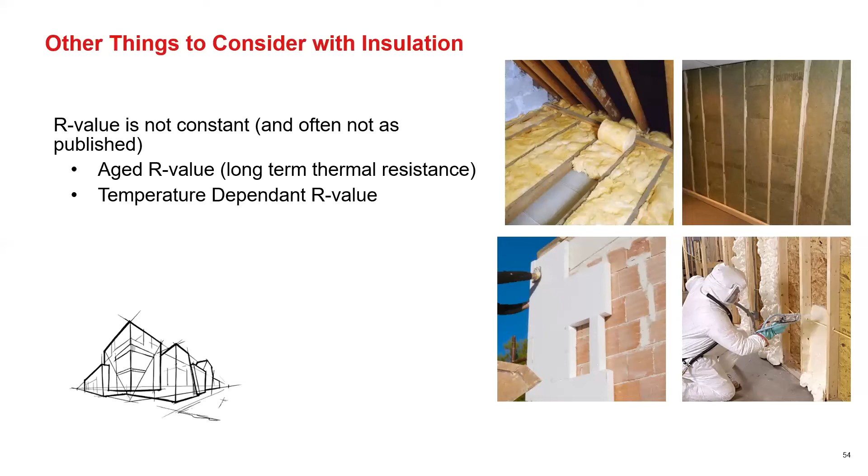So each type of insulation contains different properties, and all of them react differently to aging. The consideration of how the insulation will last through the life of the building is an important factor in the long-term performance of the wall assembly. The industry focus on R value has shifted from nominal to effective.

Great. So the difference with foam plastic insulations is, as you know, they use blowing agents inside their cells to achieve the R values. So over time, those blowing agents tend to exit out of the insulation and they're replaced by air. As the air replaces the blowing agent, the R value declines and continues to decline over time.

So this chart is basically comparing several products. Year one, they're nominal, and then over time, their effective R value. And you can see the decrease, especially in the colder climates with the foam. There's a loss of R value. And you can also note that the stone wool is consistent, very stable.

In California, along with 5 other states, I believe, the blowing agent-free regulations went into effect in January, and other states are joining as we speak in 2022. So again, blowing agent-free regulations now have taken effect.

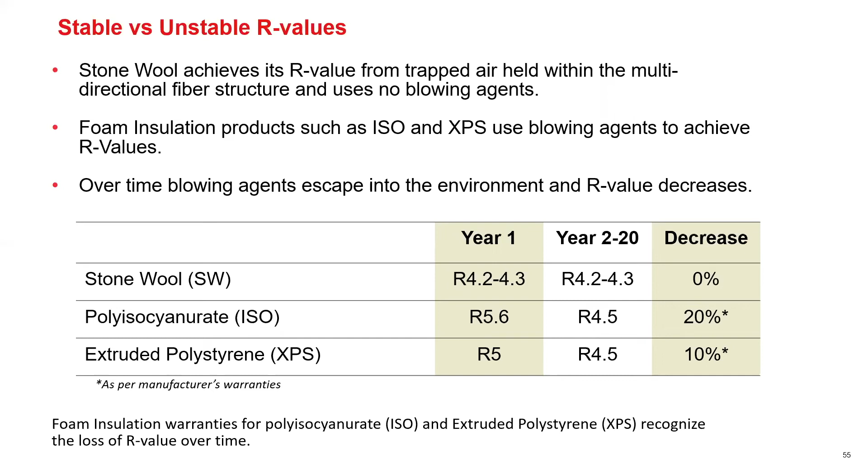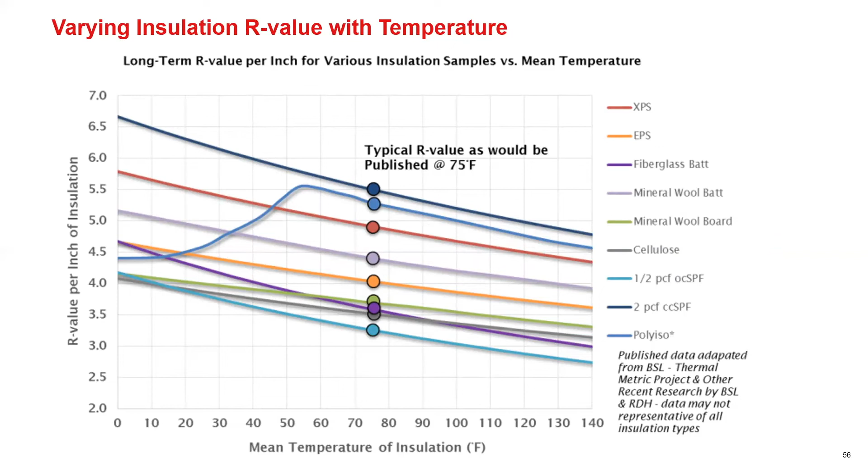So here we have an example of different insulation R values with varying temperatures. You can see each insulation R value will vary as the temperature changes, and the temperature at which the insulation is being used does have an impact on the performance of the wall assembly and the thermal efficiency and performance found during the operation.

The NRCA has done quite a lot of independent testing on products like polyiso, and rather than use laboratory testing or laboratory predictions to determine the long-term R value, they decided to measure actual samples ranging from 4 months to a couple of years. They tested around 15 to 20 samples, and the results are summarized here by the green line on the graph. The R value is on the y-axis and the temperature is on the x-axis.

When a product has an R value of 4.2 or 4.6, that is an R value measured at 75 degrees Fahrenheit, which is the standard temperature at which all insulation products are measured. At 75 degrees Fahrenheit, the performance of polyiso was 5.7 per inch, less than the R6 that the predictive testing would have said. These results are very similar to what the NRCA found.

So at the same temperature, the high density stone wool insulation roofing product measured about 3.9, which is a very significant difference in thermal performance. Interestingly though, NRCA tested the product at other temperatures, cold as well as warm, and the nominal R values of insulation increased when it gets colder because air moves more slowly in cold temperatures than warm temperatures.

Again, in the case of the polyiso, the R value actually declined as it got colder. This occurred because of the blowing agents, and the product not only loses R value over time, it loses R value as it gets colder. And again, we incur drifting, which can be detrimental to the structure itself.

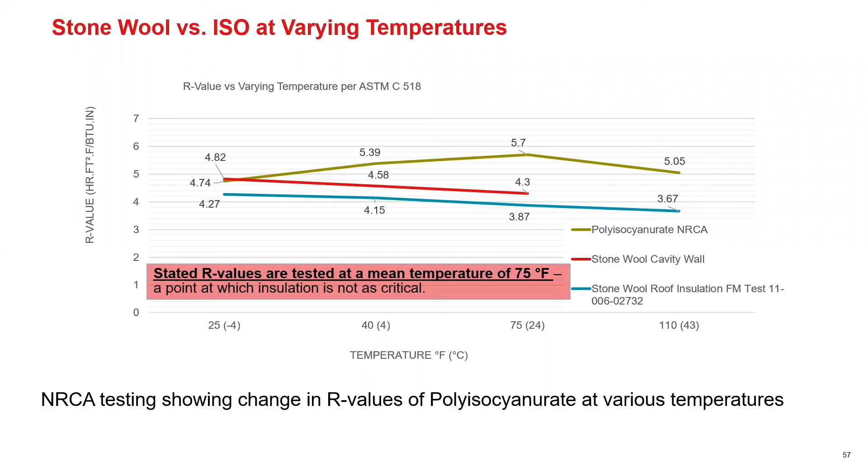All right. Todd, do you want to take it from here? Yeah, for sure. Thanks, Pamela. And so we're going to wrap up. I know we're probably a little bit over.

We want to leave some time for questions, but I think at the end of the day, we're trying to kind of understand all the considerations it takes with retrofits. And when you're looking at durability and resiliency, stone wool kind of hits a lot of buttons, right? So I think we can all attest to that climate change is real and that our existing buildings are huge contributors to GHG emissions. Deep energy retrofits have to be a key part of our strategy in not just cities, but all over to really make a difference.

I think in cities, you can make more of an argument in terms of visibly seeing the shift in terms of impact. But it's not just about reducing carbon, right? I think when we look at these buildings and we understand climate change, passive survivability is a huge component here that is oftentimes overlooked. And I think it can also be looked at as really the argument for why we need to do this and why we need to do this faster. And it's not just passive survivability. That's kind of a natural byproduct of what we're trying to achieve here, right?

There's other really critical considerations. We can't overlook the impact that our changes are making to the building itself from a structural standpoint and from a resilient standpoint. So understanding the materials we're using, the sequence of how those materials are going, understanding that we don't want to have to retrofit again, right? We want to retrofit once. We want to do it right. We want to do it to the passive house level for sure.

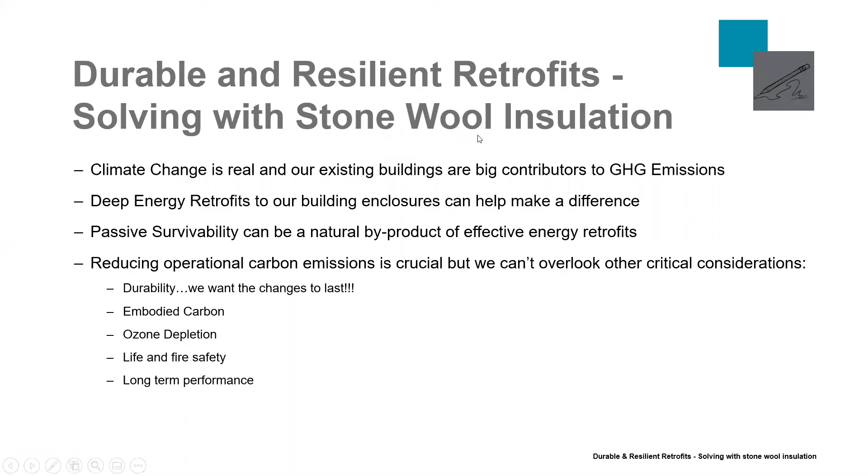Sounds good. Before we get into some of the questions, could you go back to the stone wool insulation product applications, the types of applications? Just want to point out that this slide is a great screenshot for you guys to see, but what's missing off of here is basically your fifth facade, the roof. So I just want to let you guys know that stone wool does come in tapered boards down to 0, flute fill, crickets. It really can help you provide fire ratings, even for things like steel columns in garages.

There's rated products for that, as well as garage insulation with white facers for reflective light value situations. So if you're looking at trying to use a stone wool product and you don't see it on our website because it's a rabbit hole, just reach out to Todd or myself, depending upon your location. There's a lot of other products out there we can turn you towards.

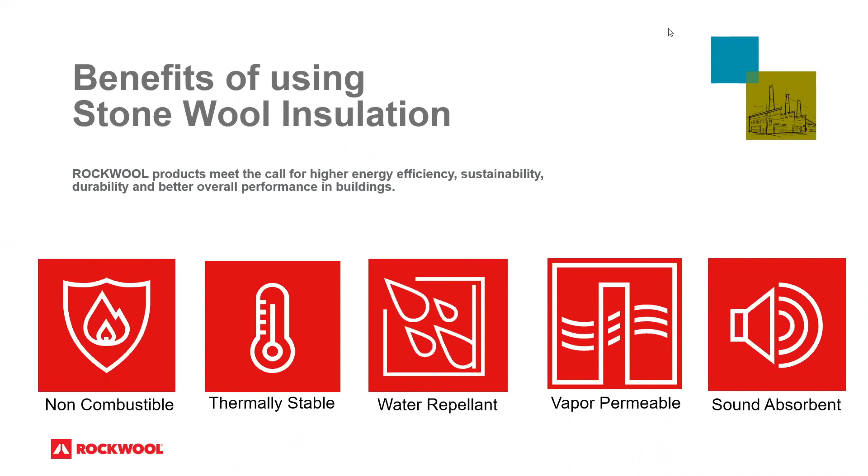The benefit here is vapor permeance, which I reiterated throughout the program: we want to make sure we can allow any condensate moisture to diffuse effectively through these assemblies. And the acoustics is another big thing. Pamela went through all the different applications that we've got.

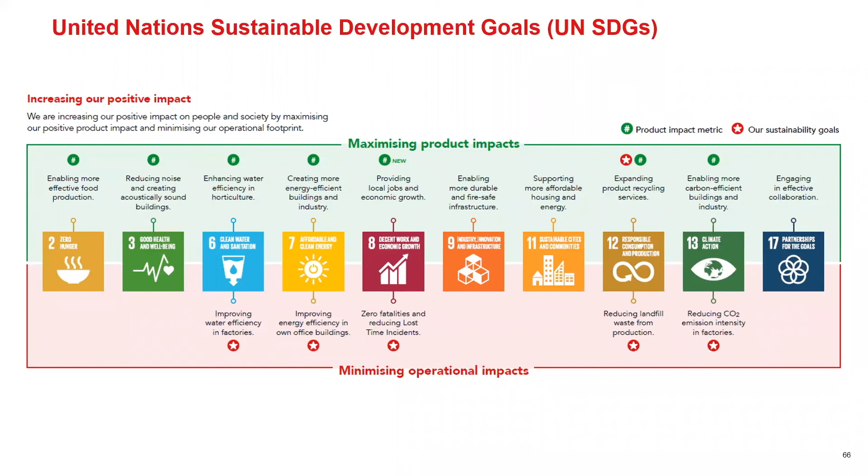From a sustainability perspective and the Passive House mantra, I think what's really unique from the Rockwool perspective is our alignment with the 17 Sustainable Development Goals. We've made a conscious effort as a company to take this on and address, I think, 10 of these 17. So we have this mantra globally to address a lot of these sustainability goals. Just to give you a few examples, one is around climate action.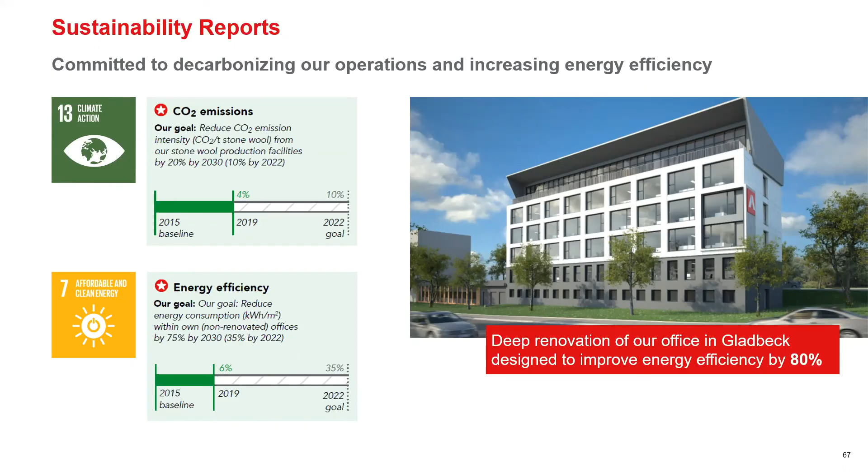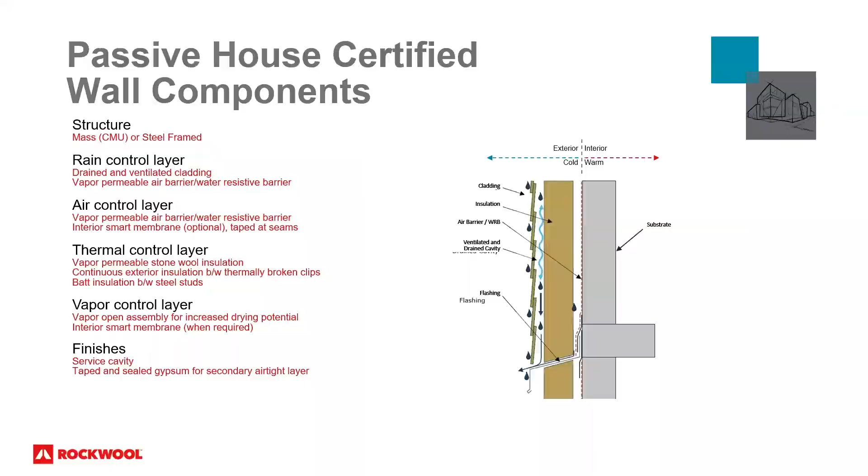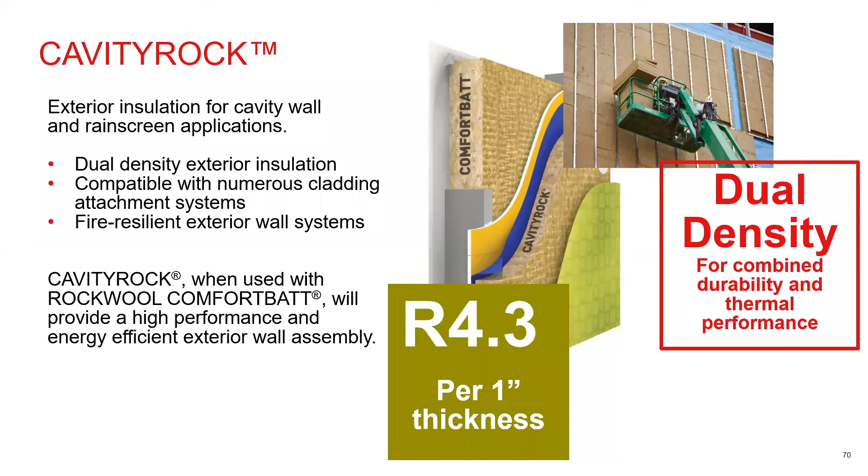In general, when we talk about Passive House and solutions, we have some really great certified details to support your efforts in Passive House. A lot of the products that you see, at least on the exterior side, for continuous insulation, our Cavity Rock product, which is an R4.3 per inch, is traditionally used in exterior rain screens. We have a black face product that we released about a year and a half ago for open joint rain screens. It was used on that job at 201 East 79th Street.

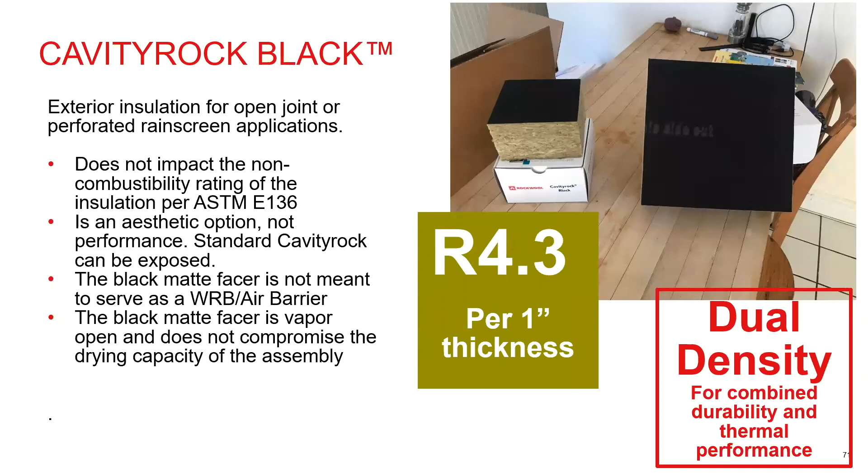So if you don't want to see our beautiful brown product in those open joints, we now have a black surface product. But when it comes to a lot of the large scale Passive House buildings, we've been kind of front and center. This is Handel Architects on the Cornell Tech building, where we were utilized in their exterior wall assembly. You can see as it's being hoisted here by Eastern Wall. Mineral wool in general, right?

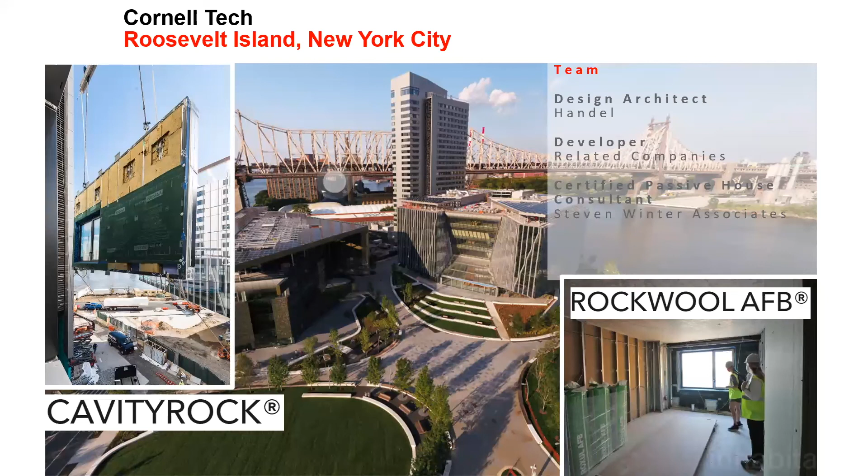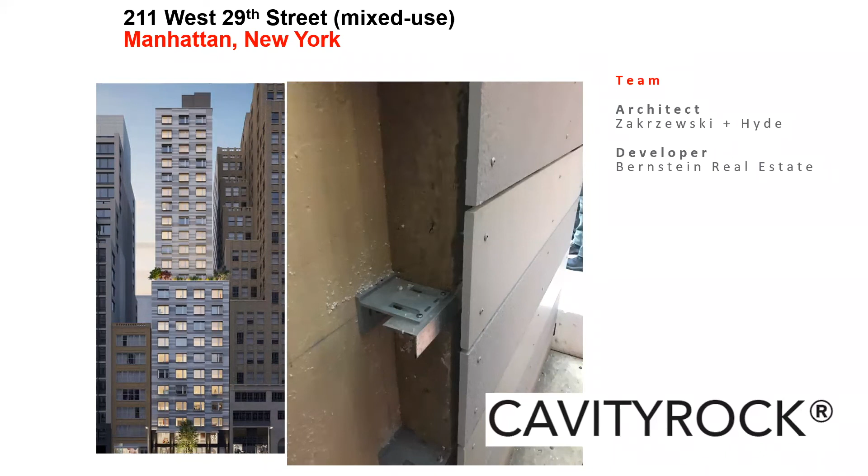This is a project by ZH Architects in Manhattan. This was, I think, the largest by height project in the world that was built to the Passive House standard. This is another high-rise project in New York City by Arquitectonica that went Passive House levels at East 86th Street that also used the Cavity Rock product behind a porcelain rain screen.

I've referenced this project earlier. This was the Candela Lofts project in Hoboken that used a thermally broken clip and 8 inches of our Cavity Rock product to achieve Passive House levels there. And there's a couple of huge affordable housing buildings that are being constructed right now in New York City. This is the 425 Grand Concourse with Dattner Architects that also uses Cavity Rock. And Handel has another enormous one by volume. I think this will be the largest Passive House in the world that is also using Cavity Rock.

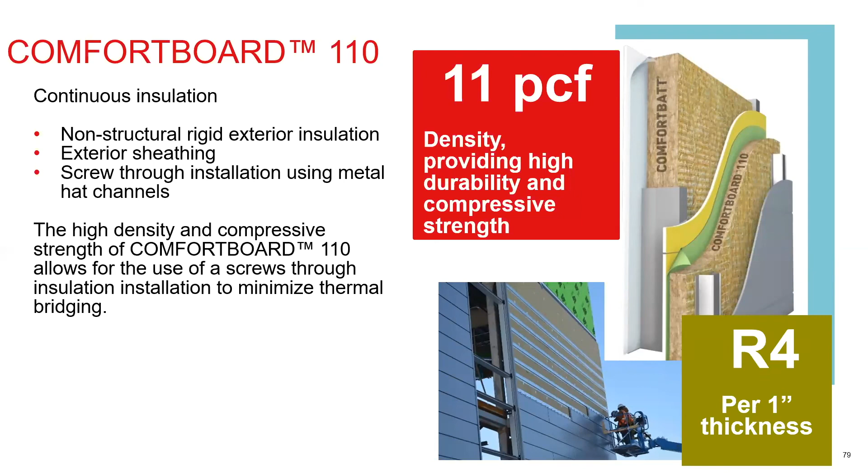So it's not just New York City. In Boston, the Winthrop Center here, also by Handel, is going Passive House that's using Cavity Rock along with some other materials of ours. So Cavity Rock is a semi-rigid product that requires clips and rails as part of the assemblies, but we also offer, again, a rigid board, which I referenced during our presentation, that has the compressive strength to transfer the cladding loads through it and reduces the thermal loss by using just fasteners.

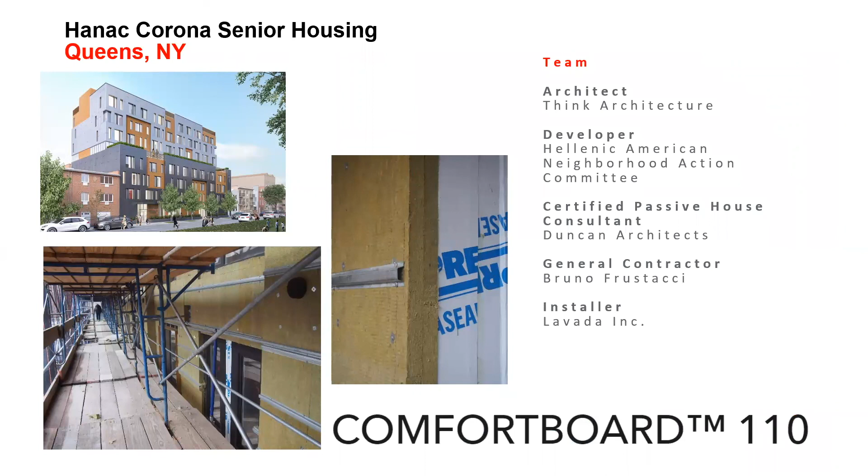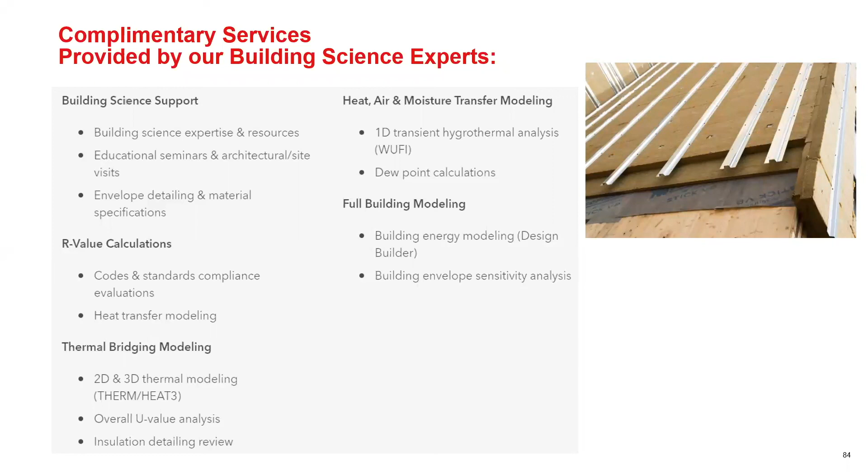And I think it's ultimately because we recognize insulation is more than just a nominal R-value, as we talked about. There's a lot of things to consider when you're implementing thermal insulation in your exterior wall. And we want to be there to service and support you guys in that effort to make sure that you're designing resilient, durable, robust assemblies. So it's a really great service that I'm going to recommend.